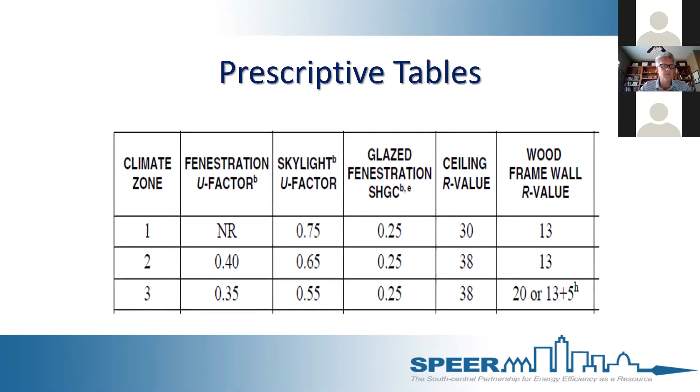So you can either build a house straight by these numbers, and that would be like a prescriptive house, or you can do trade-offs all over the place, and that's a performance house. But just to kind of give you the gist of how that works, I wanted to show the prescriptive table and just mention that those are the baselines and those can be traded off. Again, I'm going to get out of this code stuff really quick.

A lot of builders gripe, oh, it costs so much more to build a house to these new codes. And that is absolutely true, but I don't know a builder anywhere that spends an extra $2,000 on his house and just eats it. What does he do? He charges an extra $2,200 for it and makes another $200. So I don't necessarily buy that argument. The building code doesn't require an R60 wall. It doesn't require passive house, zero energy, solar panels. It doesn't require all that. It's a fairly easy lift to meet the 2015 energy code.

And what all these numbers basically mean is, yes, it is more expensive. It's about $2,000 more. That's actually climate zone 2. In climate zone 3, it's about $2,500 more. The numbers still come out to about the same. Most of us buy our homes on a 30-year mortgage, right? Well, if I spend an extra $2,200 on a house, my monthly mortgage bill is going to go up by about $8, right? If I save $17, $18 a month on my energy bill, is that house really more expensive?

I mean, I would argue, and I think math is math, right? $10 a month, that's an extra $10 to spend in my community. So actually a house built to the 2015 energy code from day one is a cheaper house, because the offset is more than accounted for in your utility savings. So it makes sense. The 2021, I'll be real interested to see this analysis. PNNL will do this analysis upon publication of the 2021. But typically, energy code improvements are vetted in the code process to have a reasonable payback. So this should all work out again with the 2021 code.

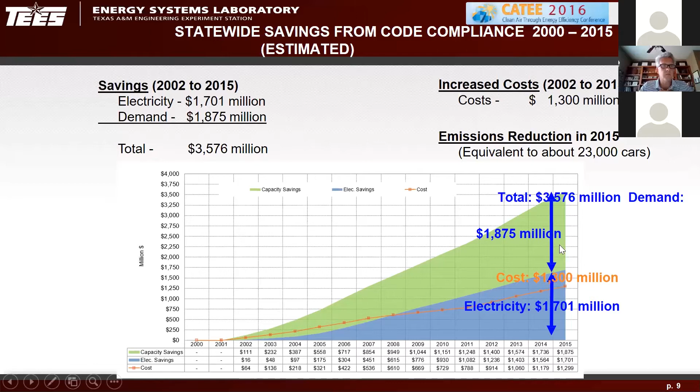This is a little busy slide. Don't try to take it all in. This is from Texas A&M Energy Systems Laboratory. They have to track air quality reductions and energy use reductions. To make a long story short, from 2000 to 2015, energy code compliance specifically has cost builders about 1.3 billion. But that kind of aligns with that previous graph: the savings have more than offset the additional cost. And you can see it there in the graph. Again, we're going to try to get out of this pretty quick. I just thought this was interesting.

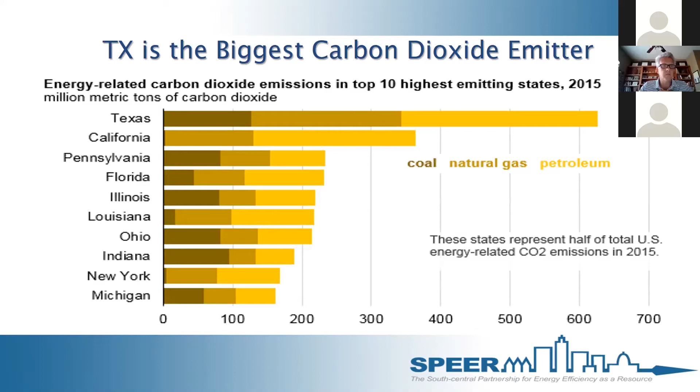A couple more slides on Texas. Obviously, we've got a lot of the fossil fuel industries down on the coast, Houston area, but the amount of CO2 that we're emitting compared to the other states is pretty impressive, about twice as much as the second state. And I love this next slide even more so. This is energy consumption by state in quadrillions.

About 40% of all the energy used is used in buildings. So making buildings energy efficient is a passion of mine. I'm one of those lucky people that gets to do something they love for a living. Once you put drywall up on a house, you're never going to go back in and fix the insulation. So getting it done right the first time is something that I love to teach and talk about. And that's why I'm here today.

Step number 1, and I cannot emphasize this enough, call your utility provider. Call your electric company. My electric company here in San Antonio, CPS, I made a phone call. They come down here. I got 2 free Nest thermostats. I got about 80 LED light bulbs that he just gave me. He went all through my attic. He went all around my house. He looked at all my windows. He looked at all my HVAC equipment.

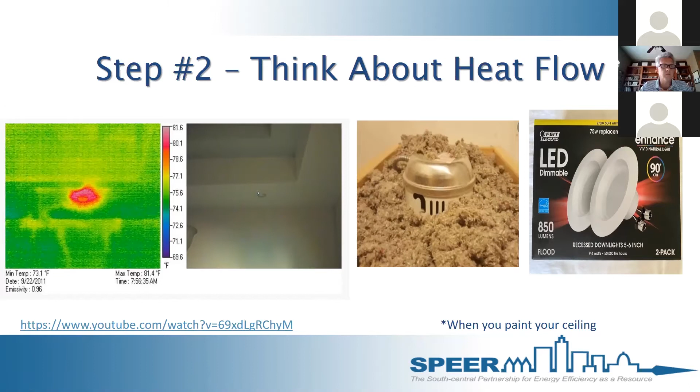Again, the number one energy penalty is air infiltration. So wherever you can stop that air moving will give you a huge bang for your buck. Caulk is $2 a tube. Super cheap, super easy. You're painting your ceiling anyway. Perfect time to do it.

So this is a wall. And actually if you're having big energy penalties and your utility person won't send out someone, and you are a diehard do-it-yourself person and you just want to figure out where your heat loss is coming from, you can get a decent infrared gun now on Amazon for about $80. 15 years ago, they were about $8,000. It's amazing how that happens.

But this is a shot of a wall right here. So this is probably blown. There's a bunch of ways to insulate a wall, but one way to insulate a wall is what's called a BIBS system, where basically they put a net over the wall studs. These are studs. And they take and shoot it full of fiberglass or cellulose. Well, you can see this wall cavity here. If they don't get these wall cavities full enough, over time they'll settle.

Well, you might take a shot of your wall and the top 2 feet all the way around your wall have zero insulation on them. Well, maybe if you do have that case, when you're painting the walls, drill some holes and fill those. You can see this little small stud cavity. They didn't bother to stuff with a batt at all.

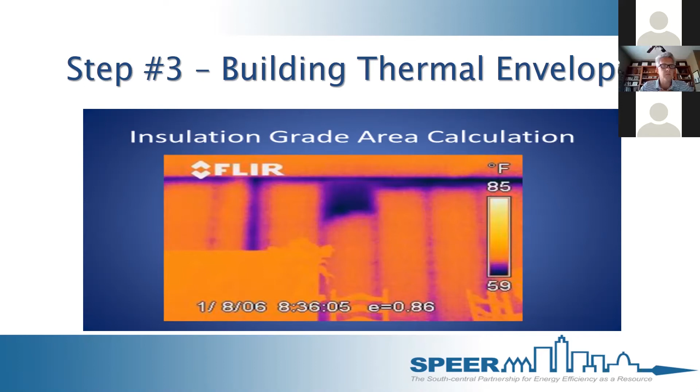And so, step 3 is think about your building thermal envelope. Again, you want to emphasize the attic to house, but walls are certainly important as well. Windows are big as well. I pulled this slide out of an insulation installation presentation I do. I know I'm going long already. I'll be done in about 2 minutes.

But the gist of this is to show you if your attic is R30, for example, and you're just missing 4% of insulation, the effective cavity insulation will be brought down to an R13. It doesn't work in a linear relationship. Delta T and heat transfer does not work on a 1-to-1 linear relationship. So have no gaps; heat transfer will find a moment of weakness.

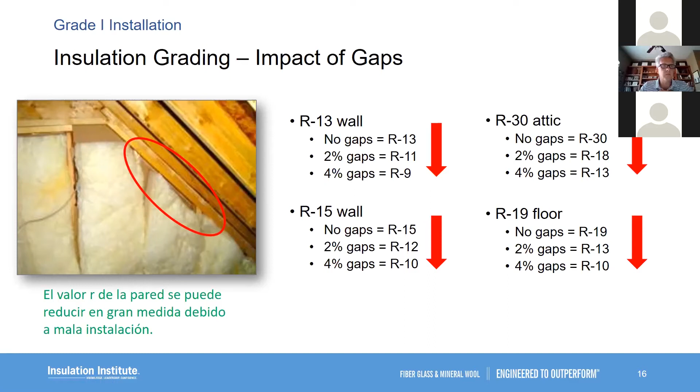So if you go up in your attic right now, I bet you have, these are called knee walls. I bet you have some of these where the batts look like this, or maybe they've fallen out. Maybe they're laying over on the Christmas ornaments, whatever it may be. Knee walls in attics, again, we have 135 degrees.

You can take this, so if this knee wall is 2 foot tall, cut this 3 foot tall, leave it a foot taller, so you have a 1 foot dam to hold your blown insulation over those attic knee walls.

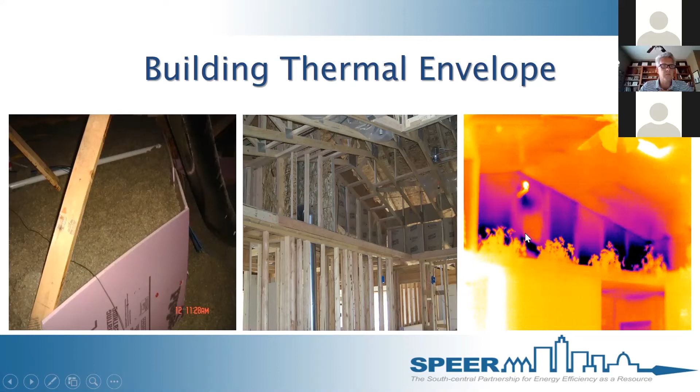This is what I'm talking about. So maybe this is on the very back side of your attic. You notice this living room's hot all the time. You'd be surprised when you walk back over here in the back of this attic, how many of these batts have fallen out of these stud cavities, and you have that 135 degree attic air directly touching a 1/2 inch of drywall. This is what it looks like in the house. Big problem with your building thermal envelope.

If you want to get a little more aggressive, either remove your insulation and foam, that's probably a little much, but say for instance, you just want to rent that machine and blow another 6 inches of insulation. Before you do that, you don't have to vacuum it all out like Matt did, but if you will pull that insulation back and seal these penetrations. This is your top plate right here. This is a major leaking spot between your top plate and the drywall. Can lights, HVAC, top plates, any of those spots, if you can seal those before you go back and blow more insulation.

If you are going to blow more insulation, keep in mind, these are what's called baffles. Your soffit over here has ventilation. Your roof up at the top has ventilation. You want to make sure that air can communicate and your attic stays ventilated, so you don't have that additional blown clogging this up and falling in. So make sure you do have baffles if you're going to do that.

I'm running long, so I'm not going to show the little 2 minutes on the video.

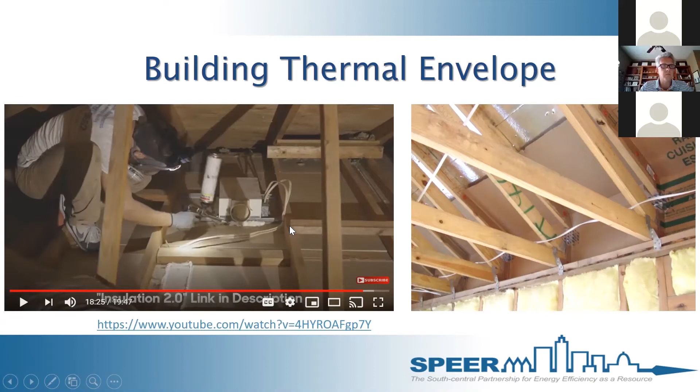If you do have a 2-story, if you notice, man, in the summer, my subfloor upstairs is always really hot, this is almost certainly the reason why. This was also pulled from my NAIMA presentation that I give for them. A lot of times this insulation is sitting down here on the drywall downstairs, which is good about keeping the downstairs ceiling cool. But the problem is, if you don't have these floor joists blocked and sealed at the end, that 135 degree attic air is communicating directly with the underside of your floor decking.

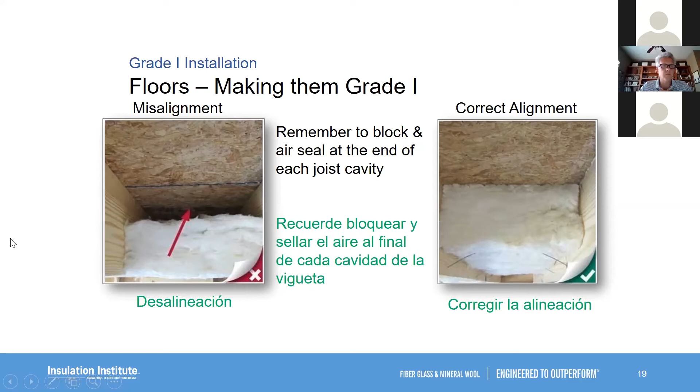So blocking and sealing, even better, while you're adding some blown, fill all this cavity with blown, and then cut a block and seal it at the end of that joist cavity. That will make a tremendous difference if that floor is getting hot upstairs.

If you have any pull down stairs or attic scuttle holes in conditioned space, I can guarantee you those are going to light up like Christmas with an infrared gun. You can buy duct board and build a cover for an attic stair. Do not stuff it with a batt. You will create trip hazards. But what you want to make sure and do is put some weather stripping where this comes so you get a good tight air seal here.

Build a dam around it and fill it up with blown. If you have a scuttle hole, one of those little push holes, you can secure a batt to the back of the little cutout for that and weather seal it at the bottom. But attic access, that'll be a big leakage point.

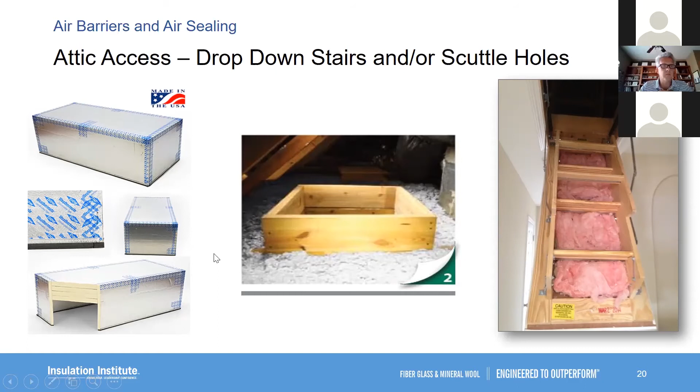And then on the HVAC, this is the last 2 more slides, I think. If you want, you can spend $150 and have somebody come out and do what's called a duct blaster test. Basically, they'll hook a fan to your HVAC ducts, pressurize all the ducts, and measure how leaky they are. Or what I did, I just went and bought a gallon. It's called mastic. It's cheap. It's $8 a gallon. It's this gray stuff here.

And you'd be surprised. Go upstairs and look at your HVAC and all the flex duct in your attic and look really close. And it even works better if your air conditioner's running, go up there and just run your hand along these seams. Just the other day I was up looking at mine and I had one of the seams blow open. I had a 1/2 inch gap, 8 inches long, blowing conditioned air into my attic. So going up and sealing these ducts will make a tremendous difference.

If you want to spend a little extra money, you can have somebody come and test them. We regularly see up to 20 to 30% leakage, in older homes 40 to 50% leakage. So literally as much as half of your conditioned air blowing into your 135-degree attic pointlessly.

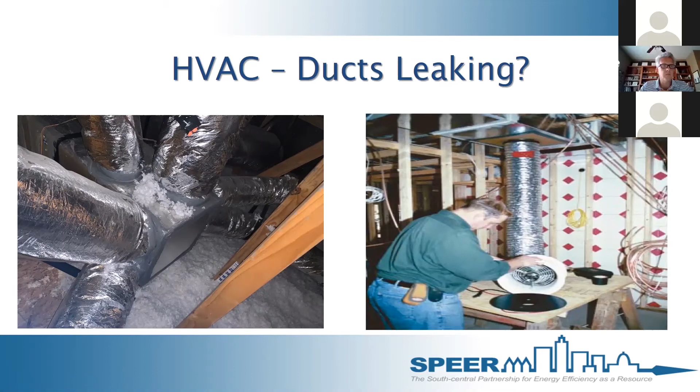With HVAC, maintenance is crucial. If you don't really know what you're doing, I highly recommend having somebody out at least once a year. I do this once a year, just take a high pressure nozzle on my hose. There's a coil in your outside unit. There's a coil in your inside unit.

This is what these coils look like if they are not cleaned. Over time, they will get filthy. The heat transfer does not work in these coils. These coils are all about heat transfer. They do not work when they look like that.

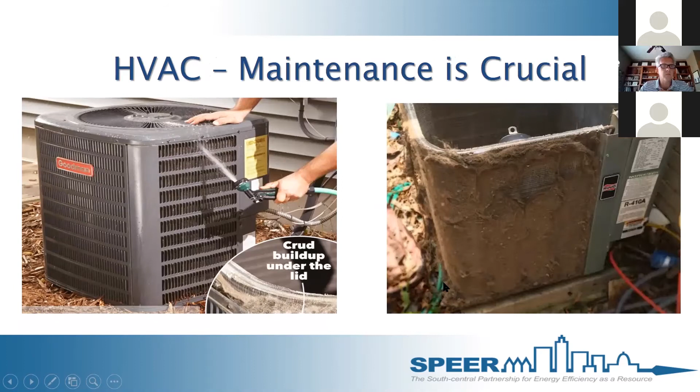Obviously, you don't want to cut 4 inches off your door, but you can do some jumper ducts. There's some other things you can do. Or I just say if these 2 rooms aren't staying cool, you can put in a cooler and put some dry ice in there, problem solved.

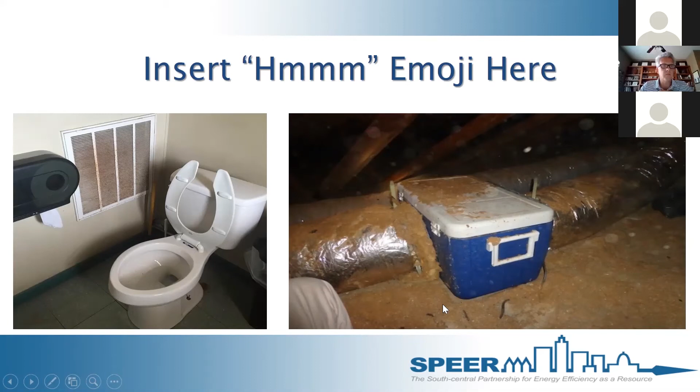Last but not least, when you're purchasing new appliances, think, oh, I don't buy anything but Energy Star. For a lot of folks, if you're going to be in the home, if you know this is your forever home, solar is a great option. It's really coming down. The payback is way cheaper than it used to be.

Lifestyle changes. I see all the time people on Facebook and whatnot, oh, I keep my house at 70, you know, and I'd be freezing in my house at 70. But the reason is I go out and work in the heat from about 4 to 6 every day. You go outside and sweat your tail off in 104-degree heat, 78 feels real comfortable.

I mentioned the solar heat gains through windows earlier. Think about keeping your windows shaded, whether it's plantings, window coverings, etc. YouTube and Google can be your friends, but be careful. I would always get confirmation from one to the other. And that's all I have. Sorry I ran so long.

That's okay. That was a great presentation, Jason. I know I learned a lot. One thing I will say is I've heard some stories about if you call your provider and they tell you they'll give you a free Nest, sometimes it requires cancellation fees and stuff. So make sure you're wary of that. But I learned a lot in that presentation. Definitely some stuff I'm going to be bringing home and considering. So thank you so much.

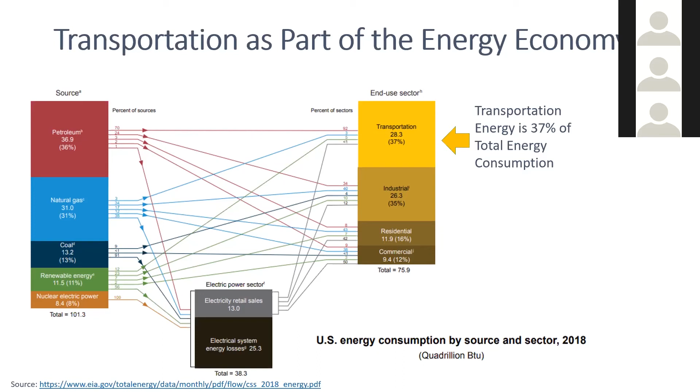So when we think about energy use, we kind of have to think of the total energy use, and transportation plays a huge role in total energy consumption in the US at about 37%. And one way to reduce energy use in the transportation sector is by using more fuel efficient cars and vehicles. So one of the most fuel efficient vehicles, especially for the light duty sector, is electric vehicles.

And I wanted to quickly highlight this interactive registration tool I have here, which we also have on our Electric Vehicles North Texas webpage. And it basically shows the registration of EVs in the region. And it looks like Irving is actually right up there with the 6th highest registration of EVs in North Texas, with about 480 EVs. And you can also see the registration of EVs in the state as well on this website. So it's a great tool to just see where your city is compared to other cities.

And so why should you consider an EV? Well, besides being fuel efficient, most EVs are less expensive through the lifetime of the vehicle. Electricity is a domestic energy source, and Texas electricity prices are very low at about 9 cents per kilowatt-hour. And electric motors provide quiet, smooth operation and stronger acceleration and require less maintenance than conventional gasoline vehicles. They are one of the 2 ZEVs, zero-emission vehicles, on the road today, and the only zero-emission vehicle sold in Texas at the moment, the other one being hydrogen fuel cell.

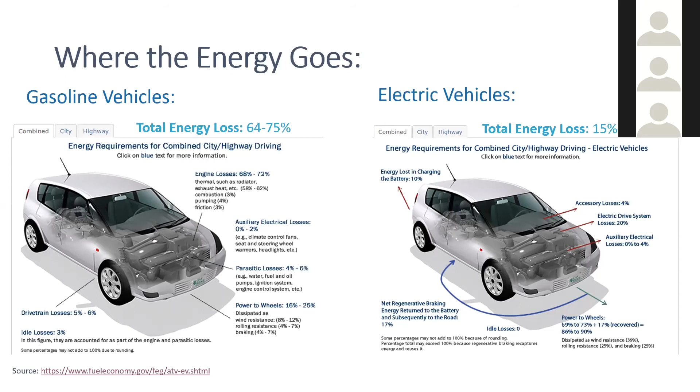So electric vehicles are way more efficient than their gasoline-powered counterparts. An EV electric drive system is only responsible for losing about 15 to 20% of their energy compared to the 64 to 75% for a gasoline vehicle. And EVs also use regenerative braking to recapture and reuse energy that normally would be lost in braking, and they also waste no energy idling.

So you can save money with an EV with lower fuel cost, lower cost per mile, lower operating cost, since you don't have to go get routine oil changes. And there are a couple incentives for Texans that can offset the upfront cost of EVs. And one of them is the federal incentive, and it's up to $7,500, and then the state rebate is up to $2,500. And we'll talk more about those later.

So I wanted to highlight a couple tools you can use to determine emission impacts of EVs compared to conventional gasoline vehicles and other EVs as well. So here is a great model, the GREET model, created by the Argonne National Laboratory, and it is a well-to-wheels emission calculator. So you can see EVs actually have no emissions pump to wheel. So as you are driving your vehicle, there are no emissions created.

The reason there are still emissions created in the well-to-wheel scenario is because of our grid mix. So since we are not 100% renewable, we have some emissions from the creation of electricity, whether that be through natural gas or petrol. And if you were to install solar panels on your house and only charge from home, you would be completely emissions free on your electric vehicle, which is kind of the goal.

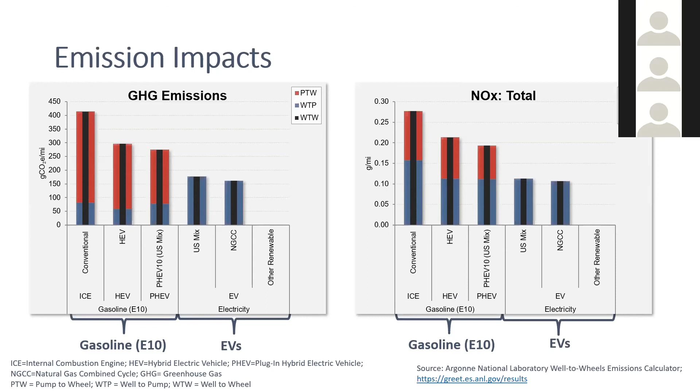So let me just get my browser up. This is fueleconomy.gov. You can find a car by going here and then just the home. You can browse by model, by class, and then by new cars. And since the new cars are the ones that are getting the incentive, let's do that today. And we want to look at SUVs.

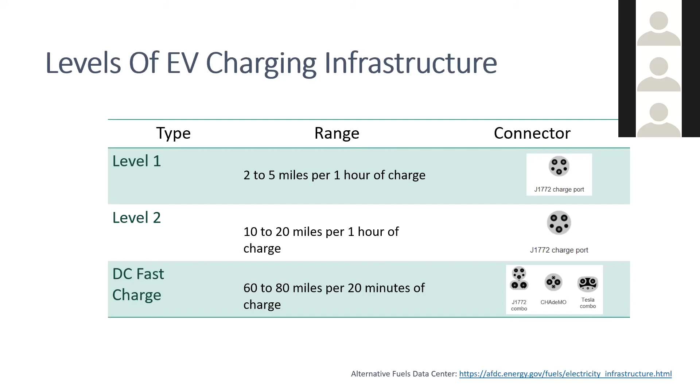Level 2 is going to be more public charging, and that's going to be like 10 to 20 miles per 1 hour of charge. And then your DC fast is like the fastest charging stations, and they do about 60 to 80 miles per 20 minutes of charge. So let's go back to the Alt Fuels Data Center.

And so you can actually, let's go to the beginning. Okay. And so you can locate your stations. And you can enter your zip code. So I believe Irving is 75014, and we want just electric. And so you can see some of the charging stations in Irving. And then if you zoom out, you can see all around Irving as well.

And you've got one at the City Hall. And then we also have one at the Irving Library. And then all sorts of places. You'll see them mostly at shopping centers or restaurants and stuff like that. So then we want to go ahead and map a route. So you can do that by just typing in 2 different locations.

So I'm going to say we're going to go from Irving to Garland. I want to do 1 mile off the route. Don't get too far off the route. So you can see the route directions here, and then also download the stations on the route through this tool. So the next tool is our vehicle cost calculator. So you can compare vehicle cost based on the different model type. And so let's go do that real quick.